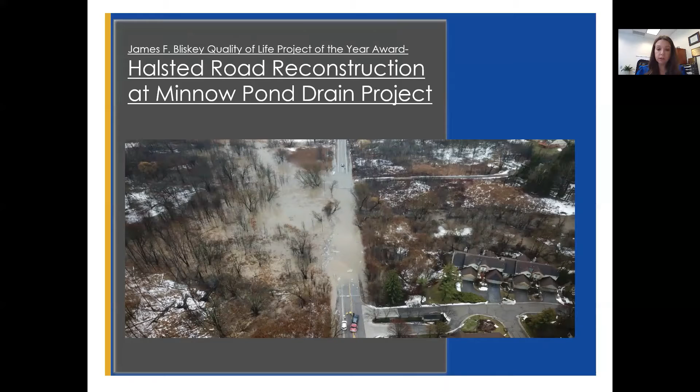That first responders could close due to public safety concerns. You can see from this slide, as well as the next slide, that the floodwaters were severe and definitely resulted in a road closure. In 2016, the city of Farmington Hills requested that the Oakland County Water Resources Commissioner prepare a concept report that would mitigate the continuous overtopping experienced at this location since the 1940s.

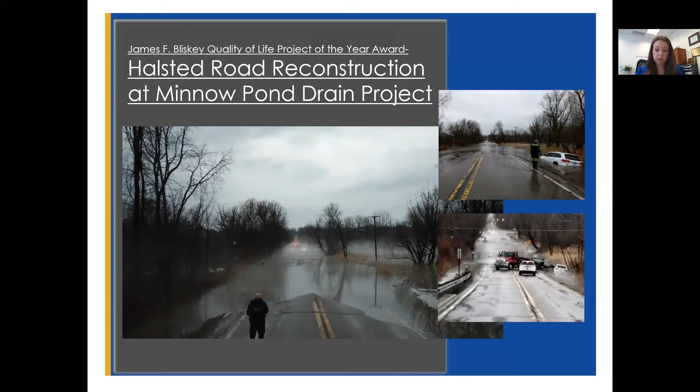The Oakland County WRC engaged the services of Fishbeck to prepare a hydrologic and hydraulic evaluation of the Minnow Pond drain in this area and provide recommendations to mitigate the frequent road flooding.

At Fishbeck's recommendation, the city of Farmington Hills elevated Halsted Road, constructed a box culvert to prevent road overtopping under a 10-year, 24-hour event, and realigned approximately 260 feet of the Minnow Pond drain immediately downstream of the existing culverts to improve sediment transport and road embankment protection along the east side of the existing roadway.

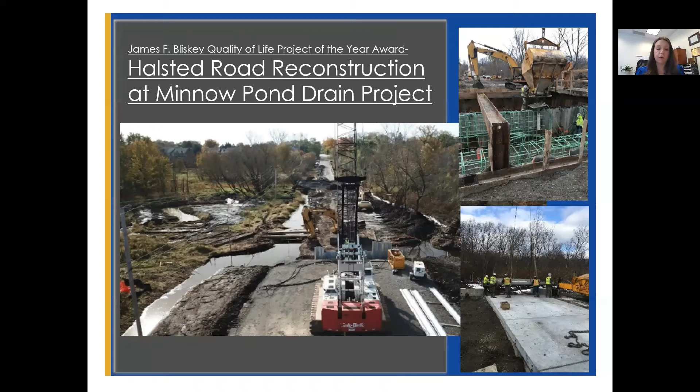The most important aspect of this project is the quality of life it brought to the community. Prior to this project, the Farmington Hills EMS dispatch would need to be advised by DPW staff or police officers if this stretch of Halsted Road was open or closed due to flooding. Since completed, overall EMS response time has improved due to long-term reliability and knowing the road is passable.

Congratulations to the Halsted Road Reconstruction at Minnow Pond Drain project team on your award.

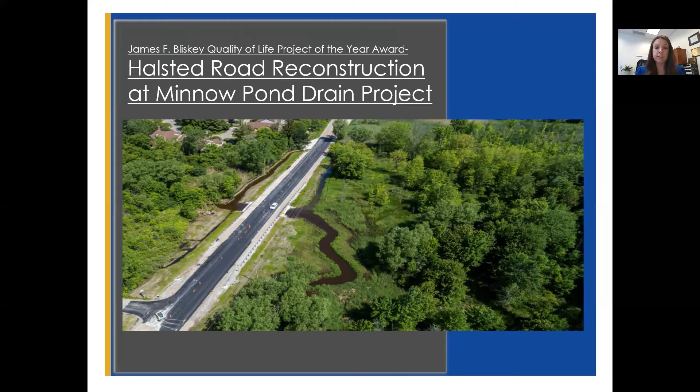The last award I'm presenting today is the Outstanding Civil Engineering Project of the Year Award. This award is to recognize a project that has demonstrated, through the design, coordination, and execution of the construction, the highest level of engineering skill, and that represents the greatest contribution to civil engineering progress.

The recipient of this year's award is the Oakland County Biosolids Project at the Clinton River Water Resource Recovery Facility. This project is being awarded by the ASCE Southeastern Michigan branch to the Oakland County Water Resource Commissioner's Office, CDM Smith Michigan Incorporated, and Tooles Contracting Group LLC.

The Pontiac Wastewater Treatment Plant was acquired by the City of Pontiac Wastewater Treatment Facility Drainage District in 2012 and is managed and operated by the Oakland County Water Resources Commissioner. The plant consists of 2 geographically separate treatment facilities, the East Boulevard Wastewater Treatment Plant and the Auburn Wastewater Treatment Plant.

The East Boulevard plant has a present average daily flow of 3.4 million gallons per day, and the Auburn plant has a present average daily flow of 6 million gallons per day. The two plants are interconnected, operated, and regulated like a single combined wastewater treatment plant.

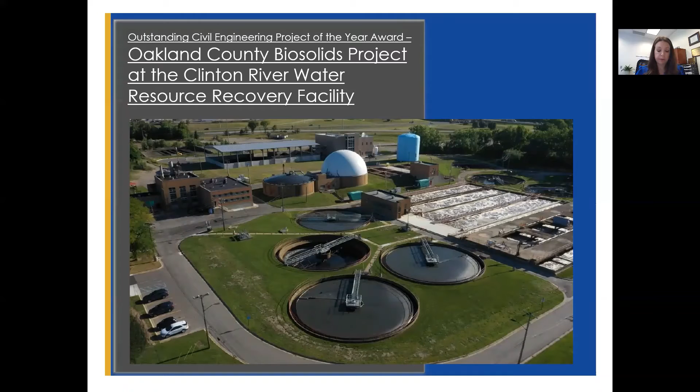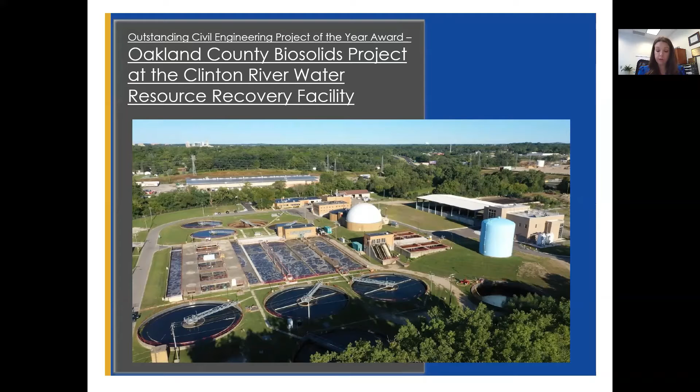In order to accept and treat the additional flow from the Perry Street pump station at the Pontiac Wastewater Treatment Plant, several improvements to the plant were necessary, including the Pontiac Wastewater Treatment Plant Biosolids Handling and Septic Receiving Facility project, which includes a new thermal hydrolysis pretreatment, or THP, system.

Sludge dewatering system improvements, expansion and improvement of the existing dewatered biosolids storage facility, and a new septic receiving facility. The THP system is an innovative process that involves conditioning of the sludge under high heat prior to anaerobic digestion. This process results in a more easily digested sludge and Class A biosolids.

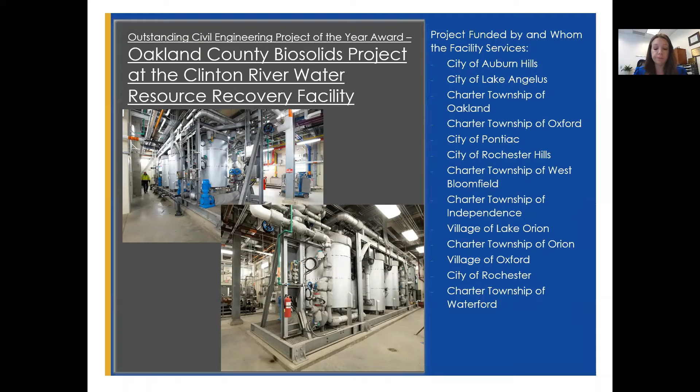The total project cost was approximately $41 million, financed through the State Revolving Fund Loan Program. The Oakland County Water Resources Commissioner's Office has put together a short video that I'd like to share with you that will go through the features and functions of the biosolids facility.

Welcome to our new biosolids handling process at the Clinton River Water Resource Recovery Facility in Oakland County. We're proud to be one of only 3 such facilities in the entire country, and the first in Michigan to use a thermal hydrolysis process, or THP, to turn refuse into reuse.

Our footprint here consists of 4 purpose-built unique structures. First, a septage receiving facility. This facility will process up to 54,000 gallons of septage each day that's been hauled to the plant from a variety of customers.

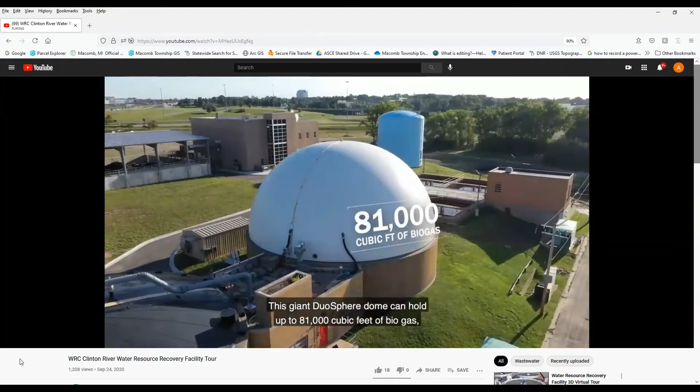Second, a secondary digester gas membrane storage dome. This giant duosphere dome can hold up to 81,000 cubic feet of biogas, captured as a byproduct of the thermal hydrolysis process, paired with the existing anaerobic digestion, which cuts our dependence on natural gas and improves our efficiency.

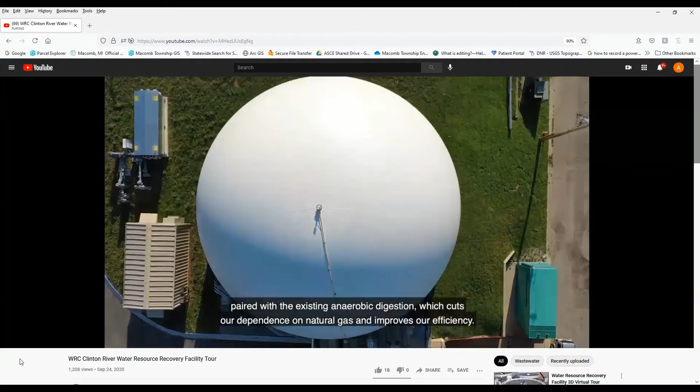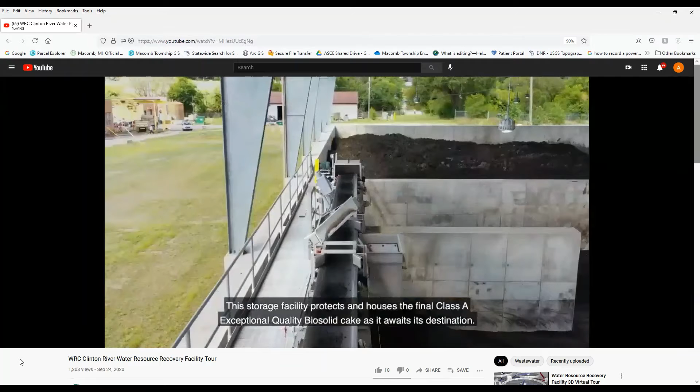Third, a covered biosolids storage pad. This storage facility protects and houses the final Class A exceptional quality biosolid cake as it awaits its destination.

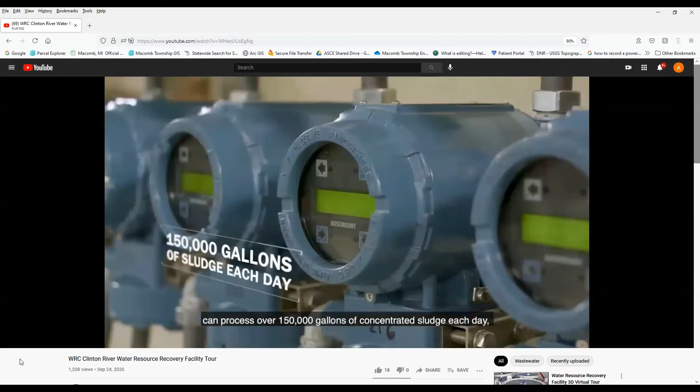And finally, a new 2-story, 15,800 square foot biosolids handling building that houses an impressive array of miles of pipes, processes, and precision-tuned instruments, can process over 150,000 gallons of concentrated sludge each day and reduce disposal costs by 50%.

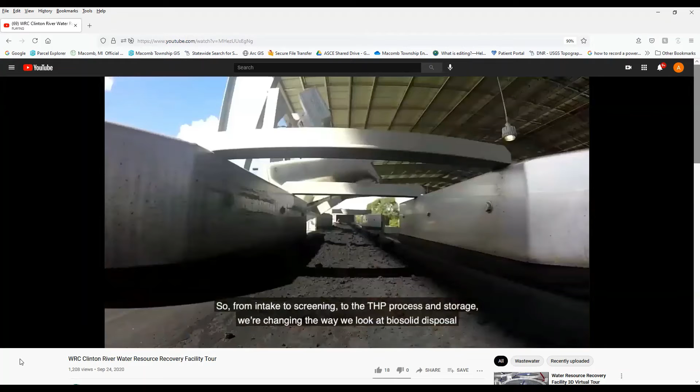From intake to screening to the THP process and storage, we're changing the way we look at biosolid disposal and making the world around us cleaner and improving the quality of all life.

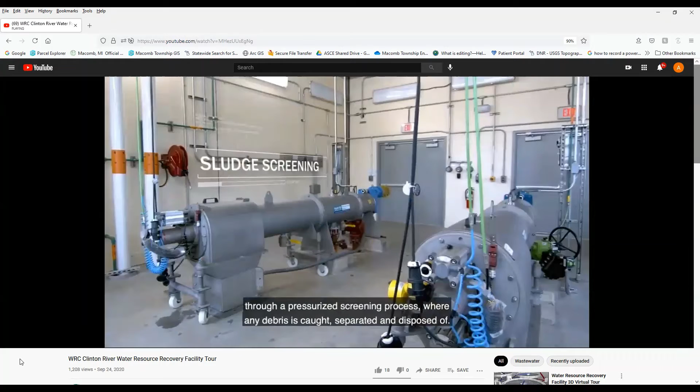At the onset of the process is the sludge blending and screening system. As the sludge makes its way onto our biosolids process, it's mixed, blended, and pumped through a pressurized screening process where any debris is caught, separated, and disposed of.

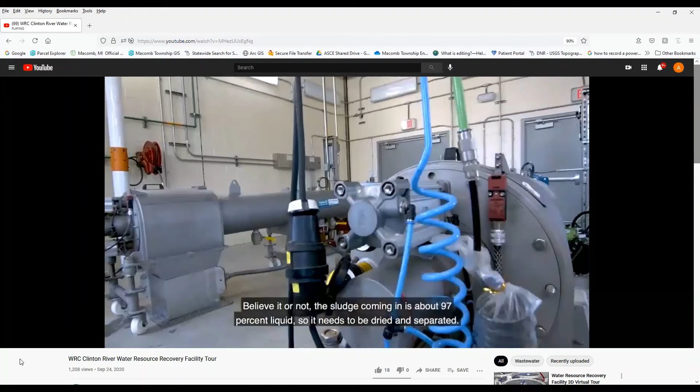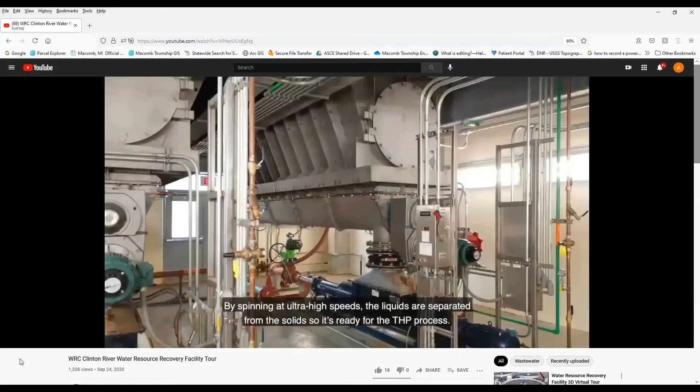Believe it or not, the sludge coming in is about 97% liquid, so it needs to be dried and separated. That's where our centrifuge comes in. In the first phase of the sludge dewatering process, centrifuges turn sludge into a usable paste-like substance that consists of 16% solids. By spinning at ultra-high speeds, the liquids are separated from the solids, so it's ready for the THP process.

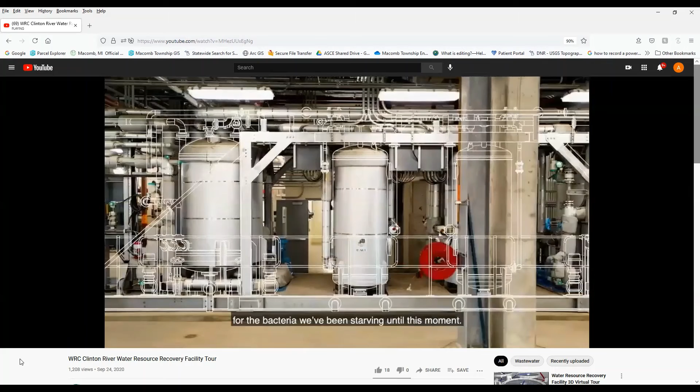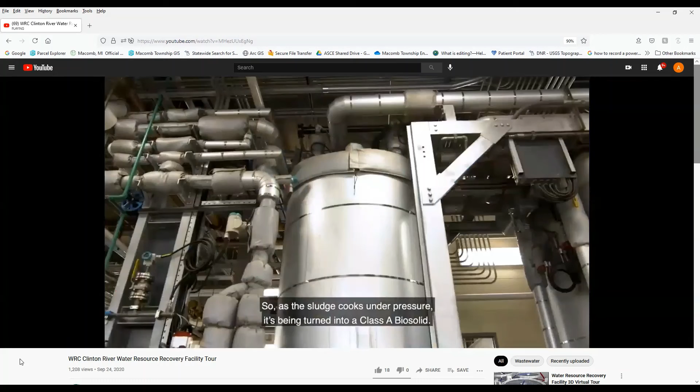The reactors in the thermal hydrolysis pre-treatment process are essentially gigantic pressure cookers. High pressure, time, and heat breaks down the biosludge and makes it more palatable for the bacteria we've been starving until this moment. They're going to help us process 37,000 gallons of dewatered sludge each day, containing 25 dry tons of solids. So, as the sludge cooks under pressure, it's being turned into Class A biosolid.

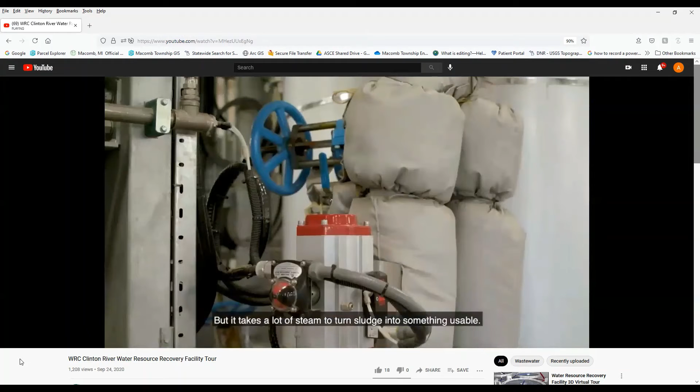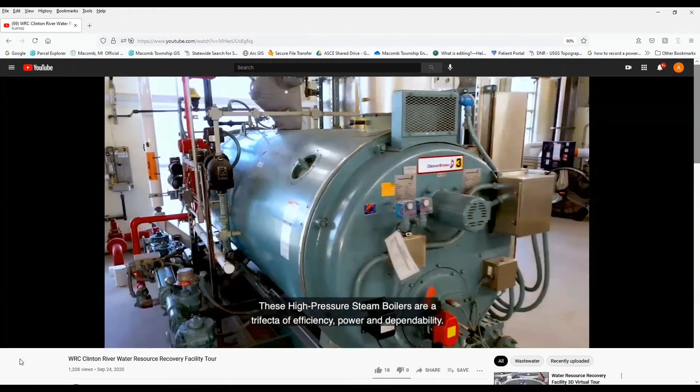Without these machines and the THP process, none of this would be possible. But it takes a lot of steam to turn sludge into something usable. Behind the scenes are the boilers. These high-pressure steam boilers are a trifecta of efficiency, power, and dependability, producing 8,300 pounds of steam every hour, reaching 160 pounds per square inch, and topping out at 240 degrees Fahrenheit is no easy task.

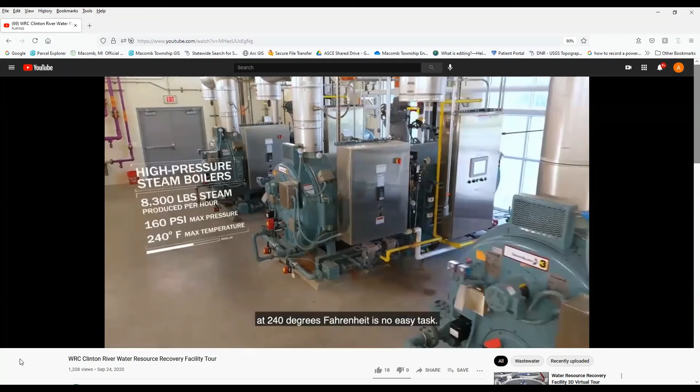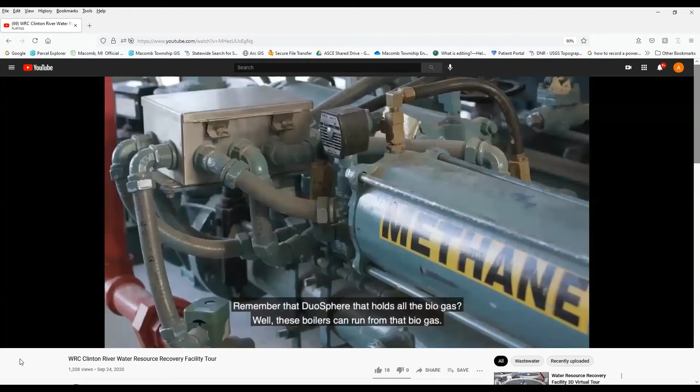But these boilers have one more trick up their sleeves. Remember that DuoSphere that holds all the biogas? Well, these boilers can run from that biogas. Using the energy from the THP process means a reduction in outside power sources and a reduction in the facility's carbon footprint.

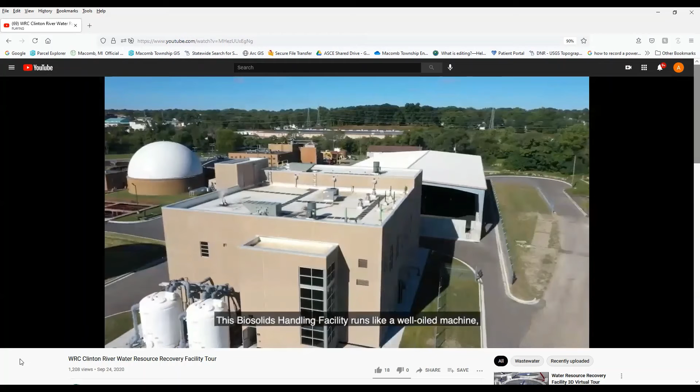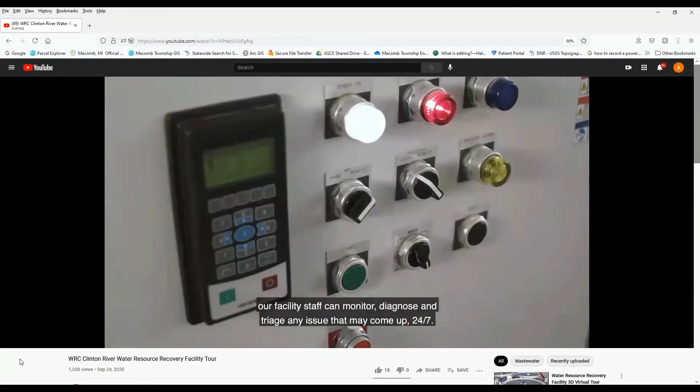This biosolids handling facility runs like a well-oiled machine, and from their stations in the biosolids handling facility electrical room, our facility staff can monitor, diagnose, and triage any issue that may come up 24/7. With over 30 electrical panels and 2 power sources, the electrical room is a central point of control as the sludge makes its way from intake to output.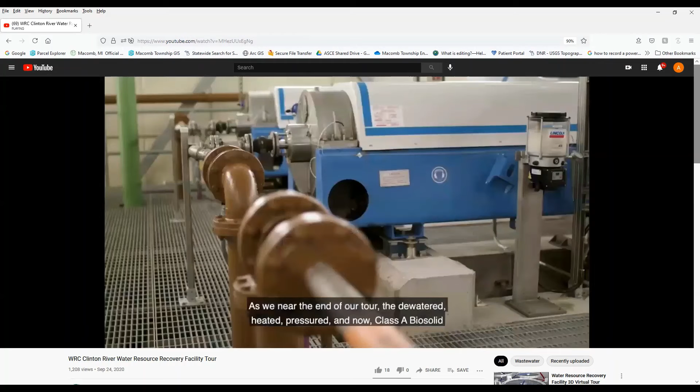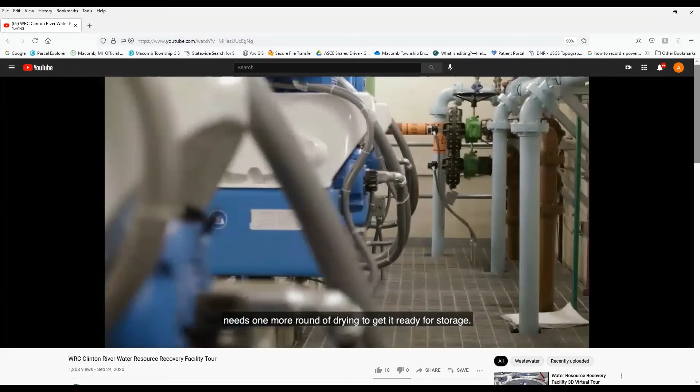As we near the end of our tour, the dewatered, heated, pressured, and now Class A biosolid needs one more round of drying to get it ready for storage. It's back to the centrifuge area, where the post-dewatering centrifuges are used to dry the biosolids into a loamy dirt-like substance. The final stop for Class A biosolids is to travel along a series of conveyor belts where it lands

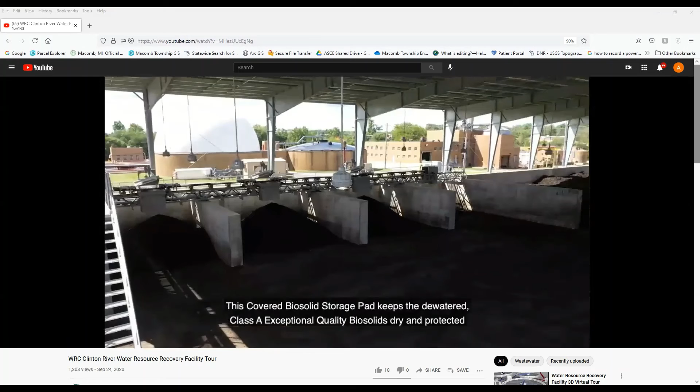in one of our 4 temporary holding bays in the covered biosolid storage pad until it's moved to the main 20,000 square foot storage area capable of holding 7,000 cubic yards of biosolids. This covered biosolid storage pad keeps the dewatered Class A exceptional quality biosolids dry and protected until it is loaded and taken away for its final application as a soil amendment or fertilizer.

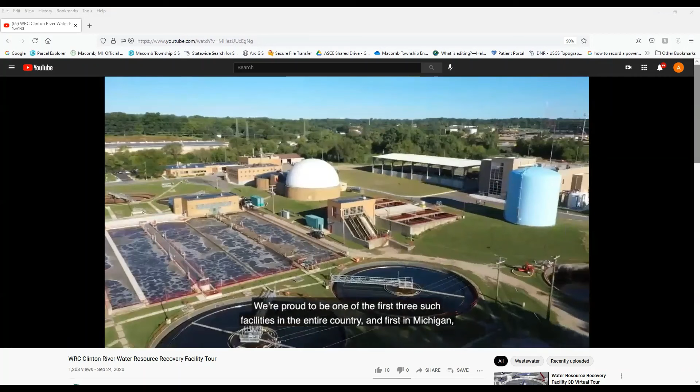We're proud to be one of the first 3 such facilities in the entire country and first in Michigan. And even more proud of the fact that the new biosolids handling building at the Clinton River Water Resource Recovery Facility in Oakland County is turning refuse into reuse. Now that's purely resourceful.